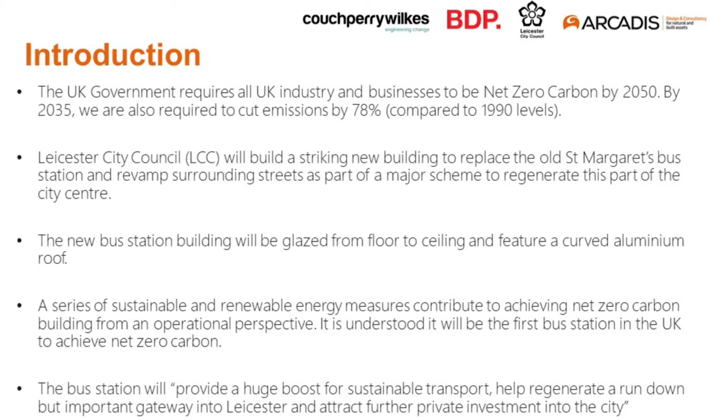The approach to net zero carbon is achieved through operational energy, which CPW will present on further. Just looking into kind of LCC's strategy.

So like many local authorities, Leicester City Council has declared a climate emergency. And after public consultation, they are now in the process of implementing a climate emergency strategy and action plan. So the authority is working to improve air quality to encourage a more greener, healthier lifestyle.

Recent examples of this are the pop-up cycleways that you may have seen introduced through the city during the COVID pandemic, and more recently the introduction of the electrical bike share scheme, and also a new fleet of electric buses powered by 100% renewable energy, which will be replacing the diesel vehicles.

At the previous webinar, Energy and Sustainability Manager Anna Dodd provided details on LCC strategy and dived into the detail. But to recap, there were 6 themes: at home, travel and transport, consumer choice and waste, at work, land use, green space and development, and the council.

This project delivers on 2 of those 6 themes, and the focus is on the council, which has owned and operated the premises, and through travel and transport. This project helps the council deliver its vision by becoming more of a carbon neutral and climate adapted city by 2030.

And this has been delivered through the infrastructure and services for promoting walking and cycling, through low carbon public transport and electric ultra-low emission vehicles and charging.

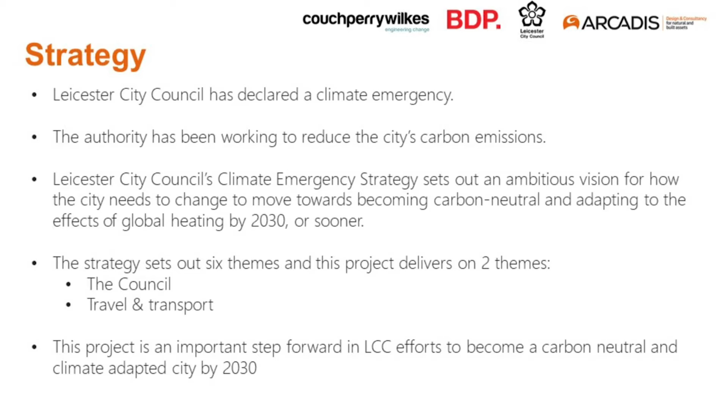Now moving into the project overview, Arcadis has been appointed by Leicester City Council to deliver a complex inner city centre regeneration scheme. The scheme comprises a redevelopment of a regional bus and national coach station, including all works to the adjacent highways, involving one of the city's busiest inner ring road junctions.

As part of the design process, several sustainable factors were considered. Firstly, we've been working with LCC to retain and reuse the structural steel frame. This yields significant environmental savings compared to recycling, at a time where there is growing pressure in our industry to become more resource efficient, reduce waste, and lower embodied carbon impacts.

Secondly, a number of sustainable technologies have been incorporated into the scheme, such as PV, air source heat pumps, electric vehicle charging points for the city's electric buses, and an electric cycle docking station. Through these, we've been able to reduce and offset the building's demand for energy to achieve net zero carbon, saving the equivalent of 96 tonnes per annum.

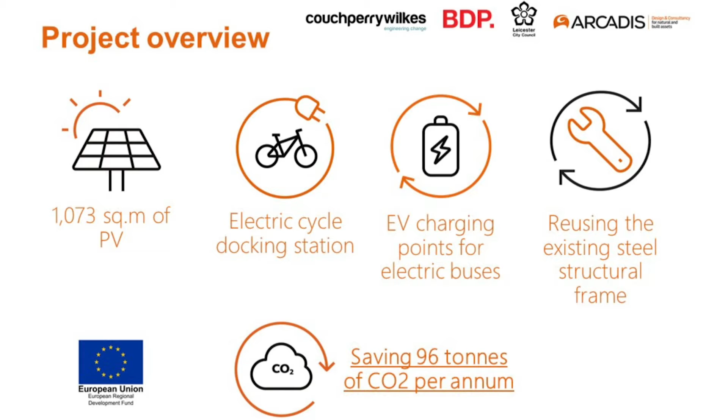This project demonstrates Leicester City Council's commitment and standard for projects and developments going forward. Thirdly, from a highways perspective, we're providing safer, better connected and more attractive walking and cycling infrastructure, in line with other cycle lanes formed throughout the city.

The accelerated programme delivery timescales meant multiple activities had to be carried out simultaneously in order to achieve the station highway works completed in line with MHCLG funding requirements. Project funding was awarded in August 2020, and planning approval was obtained in January 2021.

To maintain an accelerated programme, the building demolition was procured separately and completed in April of this year. We've recently appointed Morgan Sindall as the main contractor to deliver the project, which will be completed in Q1 2022. I will now pass over to Tom to present the building design.

So thanks for that, Anesh.

My name's Tom Hewitt, I'm director at BDP. When the council first approached us about this opportunity, they had some fairly clear objectives they were trying to achieve, and anybody familiar with the environment pre-demolition of the station will recognise that the public realm needed significant enhancement.

There was a requirement to get National Express facilities incorporated, which currently sit out onto the street and compromise the traffic and safety there. The environment itself is very narrow and quite dark.

The council wanted to increase operational capacity in line with their specific objectives for improving transport across the city. Moving onto the interior, they were very conscious it was quite an industrial character environment, and wanted a much more light, airy and welcoming environment for the increased customers.

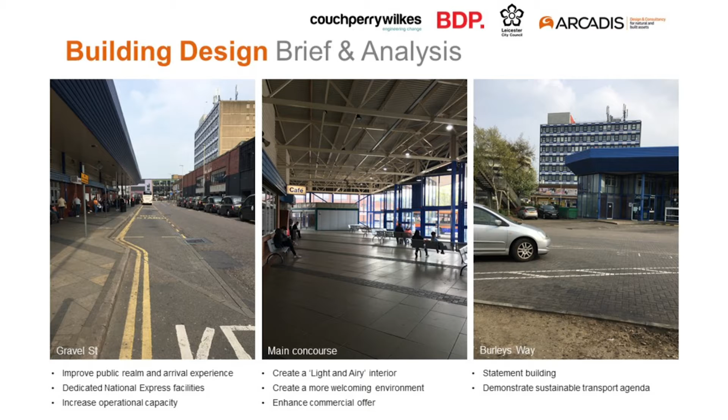They also wanted to improve any commercial offers they could within the station. Looking at the exterior, it doesn't really cut the mustard in terms of the quality of the environment this is trying to achieve - quite a heavily compromised industrial sort of environment when you see it from Burley's Way.

So we looked at a whole range of different options which configured the site differently, with the objective of trying to create both a characterful environment but also one which increased the overall capacity and improved the circulation as much as physically possible.

Whilst some of these options did increase capacity, usually this was at the expense of either customer safety, in terms of people having to cross the apron or cross between zones where the stands are located, but also created a series of separate different buildings - and more buildings means more expense, more complexity. So you end up coming back to the point where you might as well keep things more or less in the location they are.

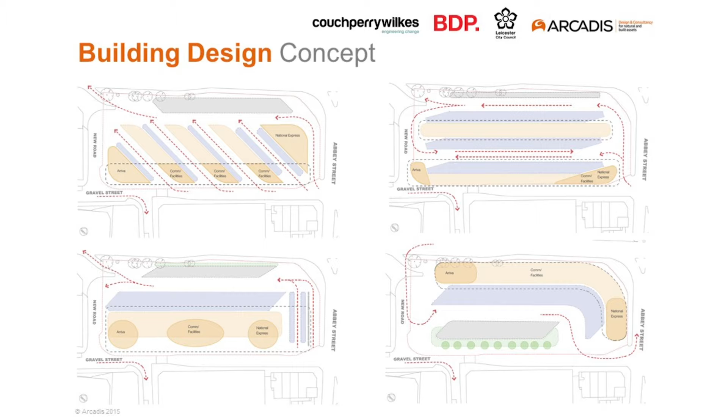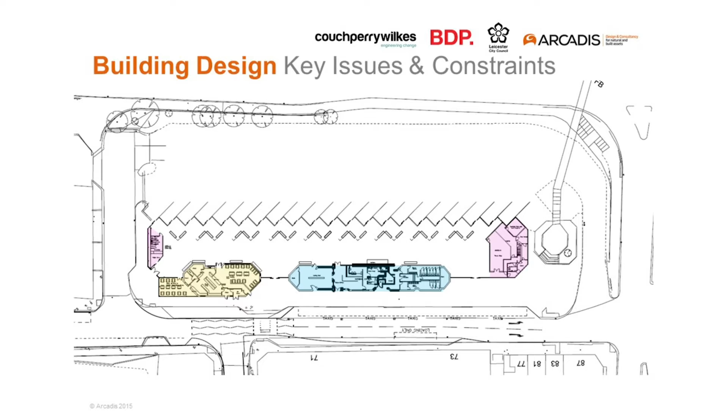And so that's where we started to look again. If you're familiar with the bus station as it was, you'll recognise that the body of capacity within the centre was all located on the west, east and southeast sides. Effectively all of the capacity blocks off your visibility into the concourse area and created a very blank series of facades with almost no windows into them.

The definition of the bus bays to the north, which was sort of sensible logic at the time, actually restricts the number of buses you can get there and doesn't give you any flexibility - there's 18 chevrons, 18 buses, and that's it. So obviously we wanted to overcome that.

The public realm we've already mentioned, but it's weak on the Burley's Way side as well as the Gravel Street side, and so it was something again we wanted to try and address.

The bridge which used to cross over Burley's Way and land right at the end of the bus station was an odd feature anyway, but that's since been removed, and that's allowed us to consider expanding the facility to the north. The other thing to point out is that none of the entrances line up with the approaches to the bus station, whether from Burley's Way itself, compromised by the bridge or trees, or from the approaching streets, so you're presented with blank walls in each of those situations. That's something we felt was important to overcome.

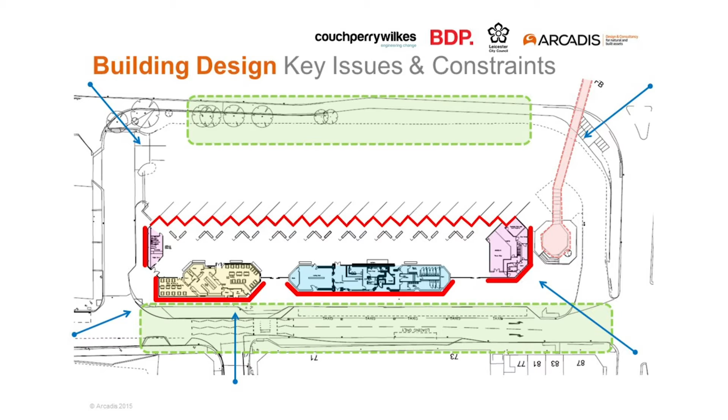Conceptually, we've looked at two fundamental issues here. The first is retention of the existing structure, reusing the building as far as we physically could, which is obviously very sensible in commercial terms, but also in program terms. Anybody aware of steel prices rocketing at the moment will recognise that anything we can do to mitigate the amount of additional steel work we need to procure is going to be sensible.

The overall conceptual approach is to consolidate all of that capacity that was previously spread around the site into one area as far as physically possible. So you can see we've grouped the majority of the capacity over two levels, now that the location allows that, which increases the capacity but also makes it much more efficient.

That then becomes a building element which separates off a new National Express facility to the north side, but also allows us to open up the whole of that concourse to achieve some of those specific objectives that the council wanted to consider.

You can also see that we've taken a straight line for the building rather than following the chevron pattern of the stands themselves, and this obviously gives us a lot of flexibility in the future, so hopefully there's some future proofing identified.

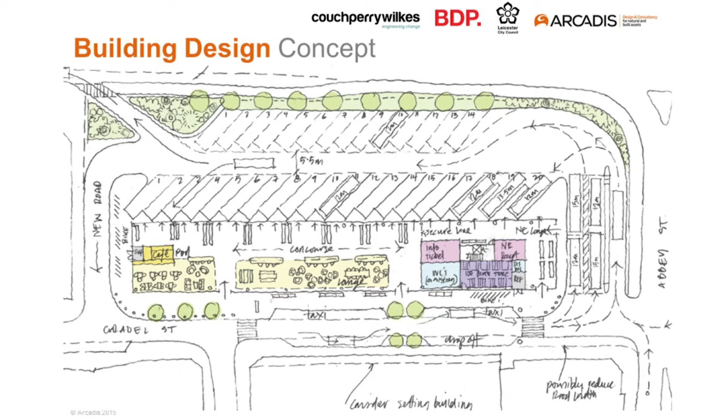You can see also that we've tried to open up the corners and create straight lines of visibility, so you can see your entrance and your target of getting into the bus station from the approaches.

As I mentioned, the sustainable objective has been implicit from the start within the brief. Whilst reusing and repurposing the existing structural frame is a good solution as a base point, architects will nearly always now be looking at mitigating other energy consumption issues. So maximizing your daylight to minimize the amount of lighting you're having to drive, and also minimizing the amount of solar gain you get, which saves on the energy costs associated with cooling that environment, are pretty fundamental to this.

They supplement a passive, sustainable approach right from the outset. Obviously this is then something we can capitalize on, as Matthew will describe later, in terms of the specific net carbon zero objectives.

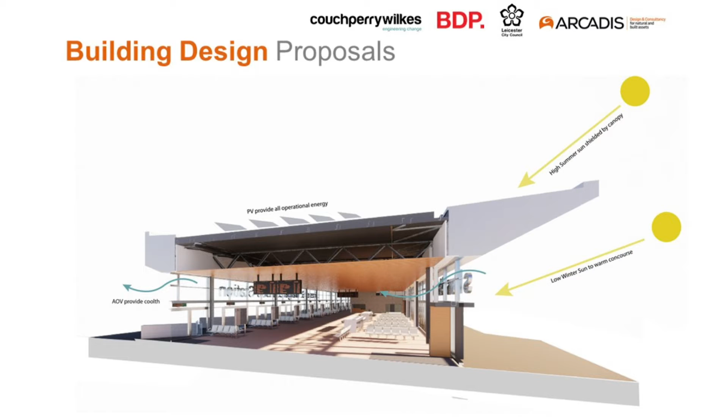Here you can see how extending the eaves on the building in strategic locations allows us to both minimize the impact of solar gain but also maximize the daylight through the concourse. We're also looking at how we can use activated ventilation so that there's a cross flow through if things do get particularly warm outside.

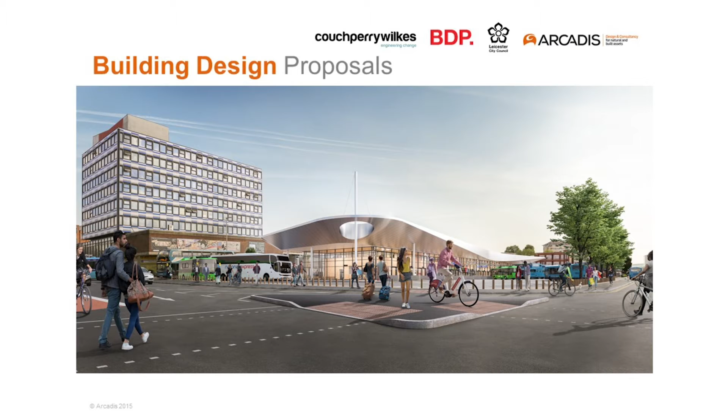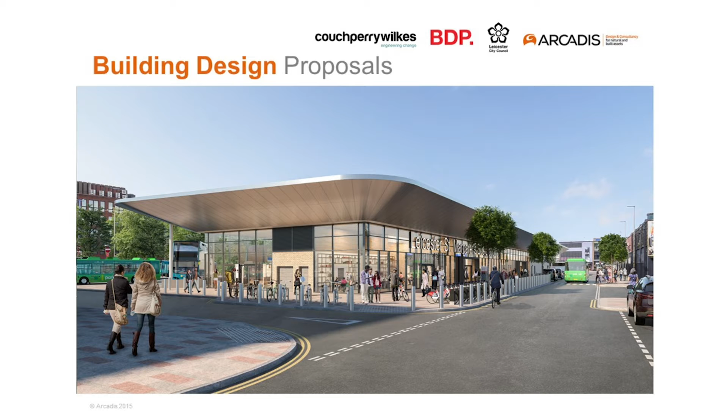So I'll leave you with a before and after image from Burley's Way, and also the before and after on Gravel Street. We're looking forward to delivering the project in the form that you can see here in the immediate future. So I'll hand over to Matthew, and he can talk specifically about the sustainable objectives and how we're achieving net carbon zero.

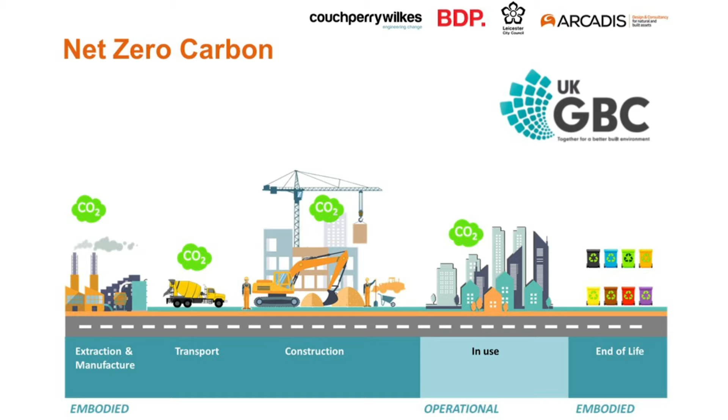I'm just going to demonstrate to you how we've met the net zero carbon targets. I'm going to refer back to the ProCon webinar that happened a couple of months ago, where John Alker from the UK Green Building Council set out the definition for net zero carbon.

Moving on to the definition for net zero carbon, this slide sets out the requirements of the different phases of the project. To the left of the diagram is the pre-construction phase, which is all of the carbon that's gone into the materials in the construction process. Then there's the in-use phase in the middle where we're working, which is the operational energy use, so we're offsetting the regulated and unregulated carbon emissions for the operational energy use.

And that's all done on site, so there's no off-site payment, there's no carbon offset going on. It's all done through a PV array on the roof, which we'll come on to talk about later in the presentation. But just referring back, as John alluded to in his presentation, realistically, to offset that embodied carbon, we would be looking at some sort of off-site solution.

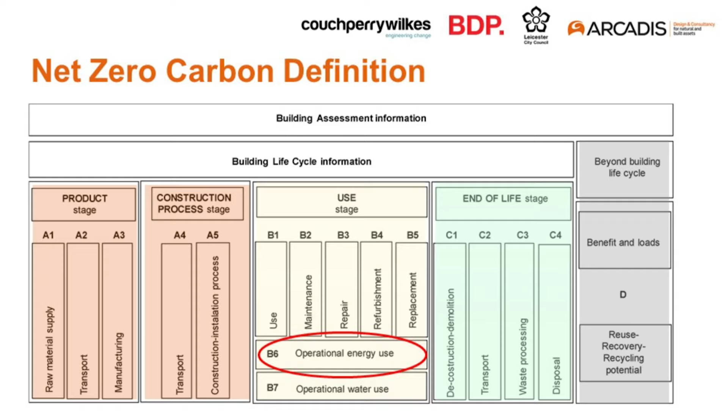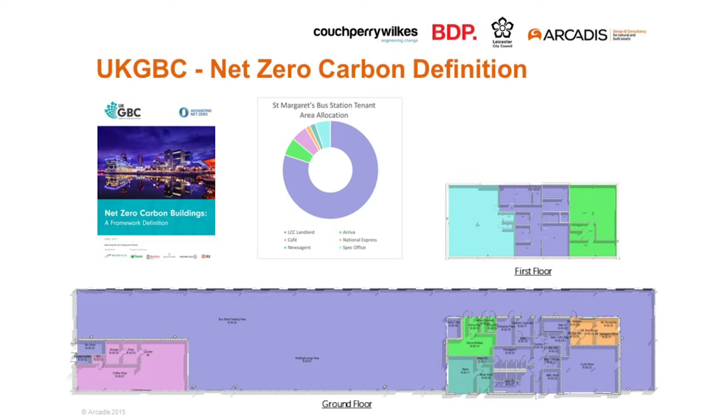This diagram shows the carbon emissions related to each tenant's area of the building. As you can see by the large bar, that's the Leicester City Council, the landlord areas, and as you would expect, it's the dominant area, representing about 75% of the carbon emissions of the building. So what we're actually required to offset is around about 96 tonnes of carbon.

Now that bar is split into two. The top portion, approximately one third, represents the regulated carbon emissions, and that includes all of the energy efficiency measures we've applied, like your LED lighting, which we'll come to speak about later. That's all taken into account in reducing that bar already. Then the dark blue element is the unregulated energy consumption.

And this is that harder to get bit. It's out of our control as designers. It's the small power, the appliances, it's cooking consumption, that sort of thing. And that's why John referred to it as the stretching target. So we're offsetting all of the emissions for both regulated and unregulated for the base building.

So this slide demonstrates how we've achieved that. As I mentioned earlier, we've got a large PV array on the roof - in fact, it's a 230 kilowatt peak array. And that's able to offset, as you can see in the first bar, the regulated emissions, and then the second bar all the way down to zero carbon for the unregulated emissions as well. That's how we demonstrate compliance with the net zero carbon target for the Green Building Council.

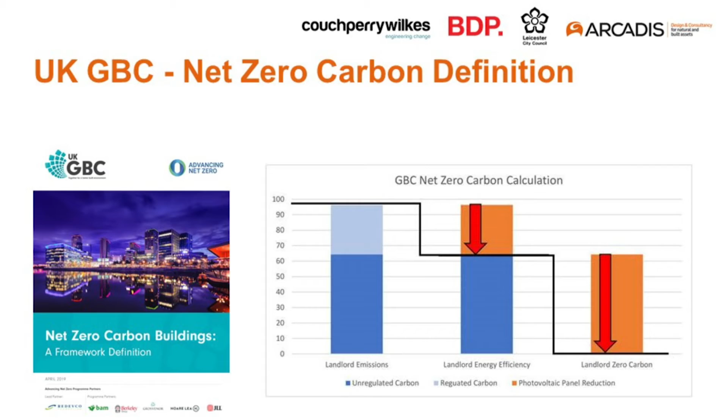And just for completeness, this diagram represents the building regulations assessment. Again, the first bar shows the actual reduction achieved through energy efficiency measures, and the right-hand bar shows the further carbon offset achieved from the PV on the roof. Now, I just want to highlight that this is exceeding the building regulations requirements. The carbon is reducing approximately 22 tonnes of carbon emissions, where our PV array has a further 42 tonnes to add on top of that building regulations requirement.

So as John alluded to, we're reaching the stretching target of the Green Building Council's definition, but we're also reaching the minimum target, as he alluded to, for local authorities for the building regulations element, which is the regulated carbon emissions for the whole building, including all the tenant areas.

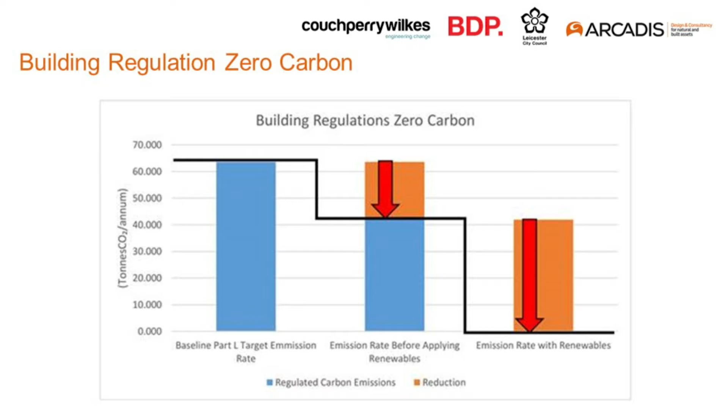Okay, so I'm just going to talk now about the M&E solution. We've avoided fossil fuel consumption entirely. We've gone with an all-electric solution, so very much in line with the government's decarbonisation strategy.

We needed a lot of glass on the project because of the type of building it is, that connection with the buses outside. The people need to see outside and into the building. Therefore, the building fabric had to be really enhanced to offset that glazing element. Now, a product of having a lot of glass, of course, is lots of natural light, which is great, but...

...the risk is overheating, so we put a lot of effort into mitigating the overheating risk. Some of the diagrams there show the sun path analysis that we did. But the main element for that was the large overhang that goes all the way around the building, which obviously offers rain canopy as well, but really it's there to control the solar gains.

A big decision on the project was about the concourse. Obviously, it's kind of 70% of the floor area of the building. And the key decision there was to unheat the concourse, simply because we're going to have a large infiltration load with people coming in and out of doors all the time, lots of air leaking in and out. Therefore, the decision to keep the space unheated was sensible in terms of energy efficiency. Then we can just treat the tenant areas within the building itself - still have an external thermal envelope, but have an unheated concourse area.

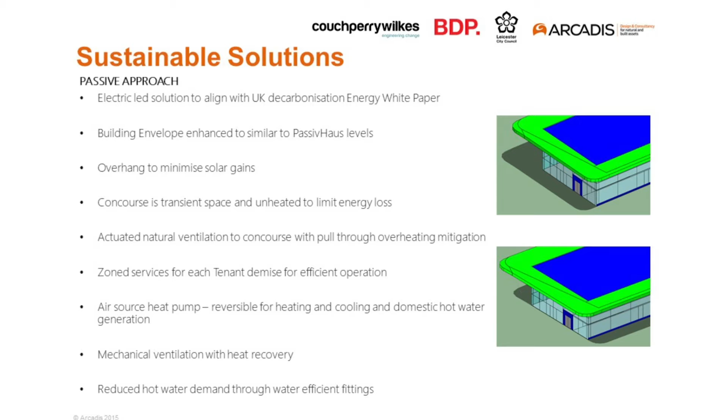Another benefit of having the glazing was that we could have lots of window openings for natural ventilation, so we're able to have a nice, light, airy strategy, which was the brief in the first place for the concourse. Then on top of that, we've got zone tenant areas, so that if any one of the tenant zones was unoccupied for a period of time, it could still operate efficiently because those services could be isolated.

One other thing I want to highlight is a bit of a contradiction between energy efficiency and the function of the building: the cafe area. We've got a cafe tucked away as part of the concourse. From an energy efficiency point of view, I want that box sealed because we're treating the air within the cafe space. However, from a retailer's point of view, they want it nice and open. I want to highlight that because it's one of the contradictions we work through between the function of the building and trying to achieve the zero carbon status.

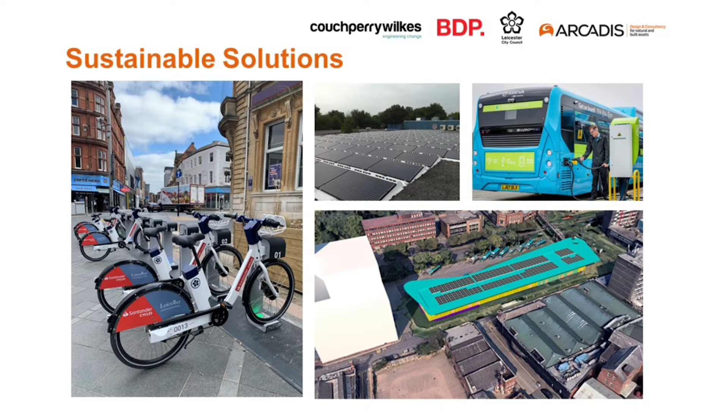The other sustainable solutions for the project, as I mentioned before, we've got our roof-mounted PV array doing all of our carbon offset on site. Some of the other solutions include electric bus charging elements and electric bike charging elements. So not only are we offsetting the emissions from the building, but we're starting to provide that low carbon economy solution for all of Leicester, and also starting to offset the emissions from the transport sector as well.

So in summary, we're achieving the net zero carbon target for both the Green Building Council's definition for operational energy and also the building regulations requirements, which we'd traditionally see as planning requirements. We're getting not only cost and programme savings from keeping the existing steel structure, but the embodied carbon savings of keeping that existing steel are huge, as are the carbon savings from retaining the existing apron where the buses are outside. We've got lots of natural light into the building whilst controlling that solar gain, so we've managed to achieve that light and airy feel in the concourse area, but in an energy efficient way.

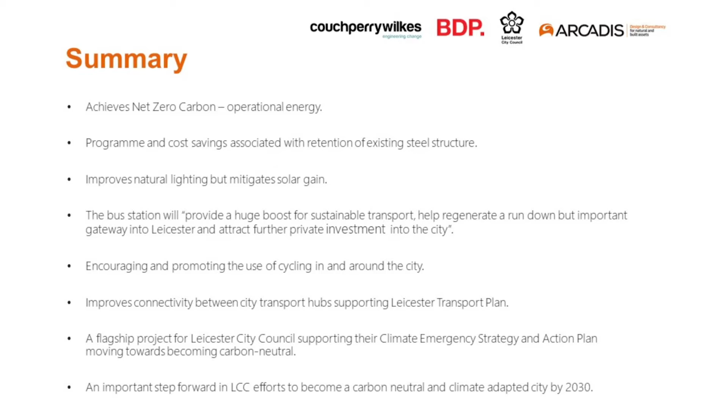Obviously, the development's going to provide a huge boost to the city in that area. It's quite a key gateway into the city, and hopefully this is the catalyst now for regeneration of that part of the city centre. It's encouraging, again, low carbon solutions in terms of transport around the city, very much in line with the Leicester Transport Plan. We see cycle lanes being installed, and it also connects the city's transport hubs between the various transport sectors. It's a flagship project for Leicester City Council, very much supporting their climate strategy and that move towards the 2030 target of achieving carbon neutrality. Okay, thank you very much.

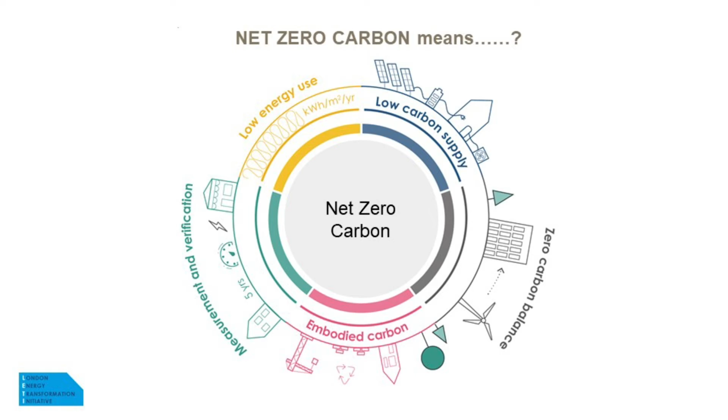Willmott Dixon as an organisation has committed to adopting the UK GBC net zero framework and also LETI's approach to net zero carbon in the projects we're delivering over the next 10 years. To break that carbon life cycle of a building down into chunks, if we look at the amounts of carbon emitted in a construction project, we've got a big chunk at the beginning associated with embodied carbon, all of the materials and processes to deliver the project to a stage of PC.

Then we have a number of years of operation where that building is using energy and emitting carbon associated with that energy, and some lumps of embodied carbon associated with replacement and maintenance of kit. Then finally, at the end of life, we've got issues around how we dispose, recycle or reuse that building and the carbon emissions associated with that.

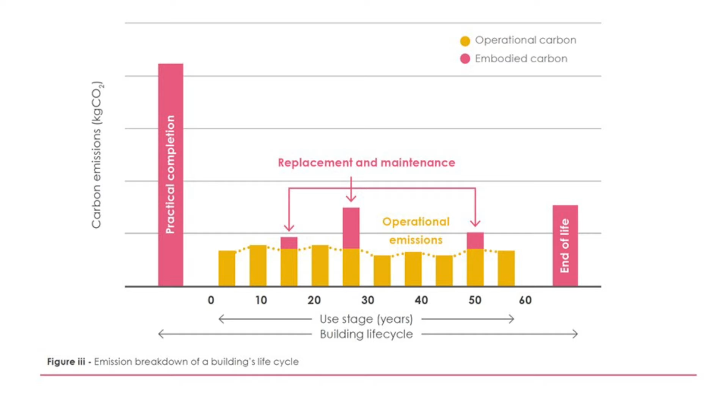So that whole life cycle is divided into both embodied and operational carbon emissions. The principle of net zero can be defined in two ways. One is that all of the operational carbon associated with any new building or development we create is offset or balanced by an equal amount of carbon in terms of renewable energy or emissions reductions elsewhere.

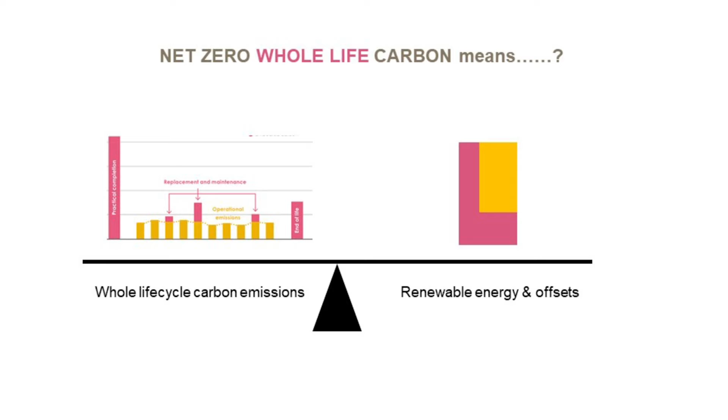So that new development is net zero, it does not create any net carbon emissions as a result of operating. If we want to take it a step further and look at whole life carbon, that would entail all of the emissions associated with the entire life cycle of the building, from raw materials all the way through to the end of its life, being covered by that renewable offset and balance. That's a much more challenging target, and one worth thinking about in terms of which of those two things is important to your organisation when aiming for net zero projects.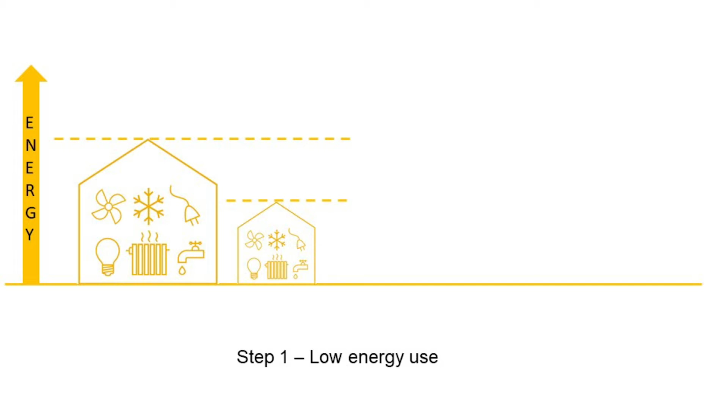The most important one of those is the first, and that's to make sure that the amount of energy our buildings and homes are using is as low as possible, to drive that down to the lowest feasible level that's economically achievable for the project. So how low do we need to go? That's the question that is perhaps at the heart of net zero buildings.

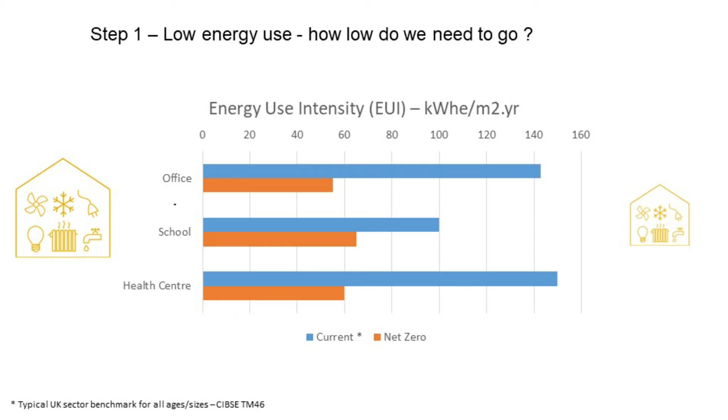So how do we do that? There's a number of different solutions, but one I'd like to touch on today is Passivhaus. You can see the energy efficiency standards that Passive House sets, and it's broadly in line with the targets that net zero buildings require. So if you're building to Passive House, you're automatically ticking the step one energy efficiency box.

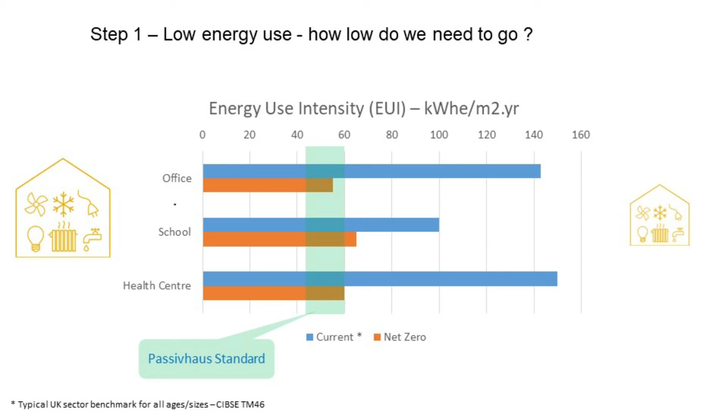So Passive House delivers both high energy efficiency and great air quality and environmental standards in terms of comfort and building space. It's an interesting approach, and one that I'd recommend you investigate.

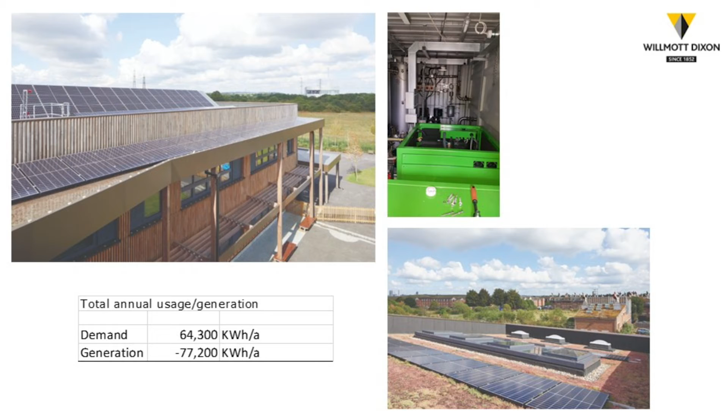Another project we completed is interesting from a net zero carbon point of view. It achieves the Passivhaus Plus standard, which is essentially all of the energy efficiency benefits Passive House gives, as well as an additional amount of renewable energy. You can see the figures showing the annual energy demand and the amount of renewable energy generation from the solar PV systems on the building, which are in excess of the energy demand annually - making it essentially net zero inherently in terms of its energy efficiency and renewable generation.

And we'll talk about that in a sec when we look at solar PV in a bit more detail.

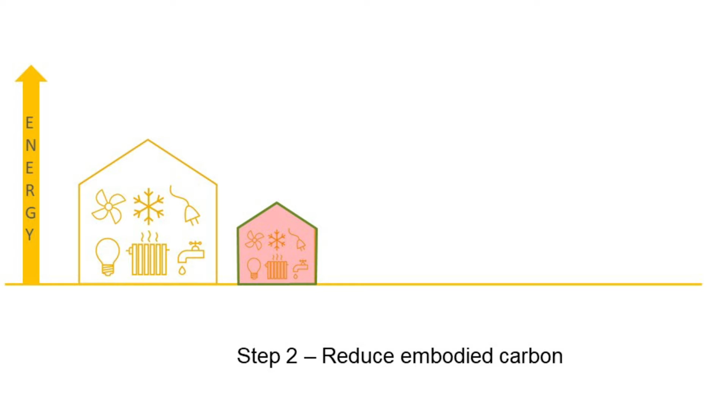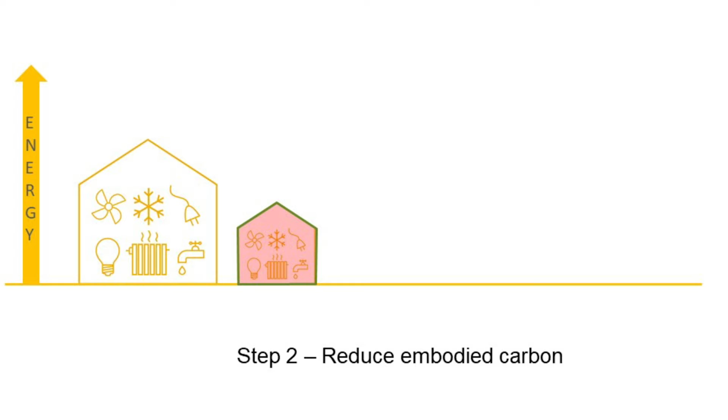Step 2 in that journey of net zero buildings is, once we've reduced the energy, what do we then want to consider doing with embodied carbon and all of those issues around the materials and processes that go into creating the building in the first place.

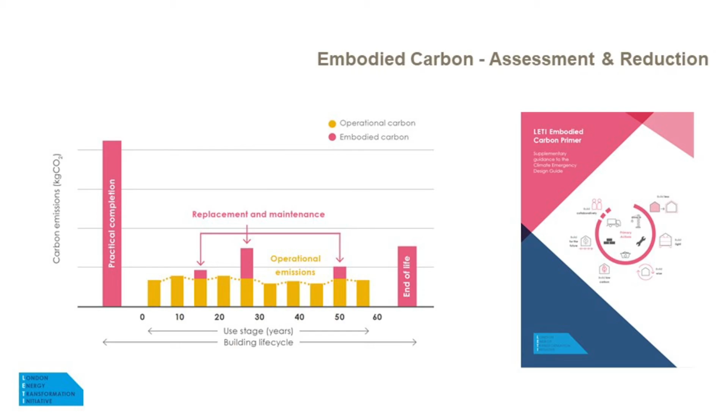Essentially the key message there is measure it. We don't put figures on this in construction projects routinely these days, and that's very much the first step, and the step that Willmott Dixon's taking on our projects is to robustly assess and develop options for reducing that embodied carbon.

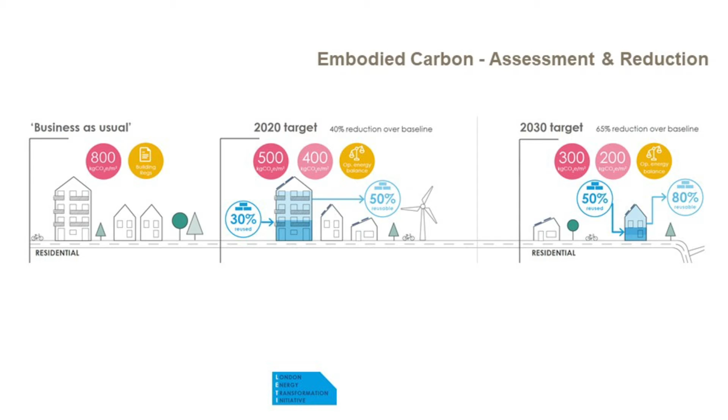So one of those is a residential project that we're currently about to launch, which is a standardized and bespoke way of making residential development homes which achieve net zero carbon in operation and also have been optimized for running costs and embodied carbon reductions through their life cycle.

We want to show that through projects and offers like this that these things can be practically delivered in today's environment.

So the third step in our net zero building is, having reduced our energy and thought about our embodied carbon, to balance that carbon emission with low carbon energy supply.

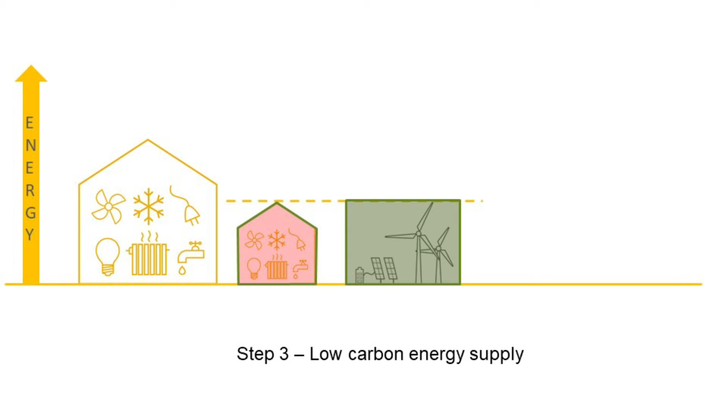And the method that we've used most extensively currently in the projects we're delivering, and find to be an excellent solution in terms of performance and outcomes, is solar PV generation.

You can see there one of the buildings that we've created at the University of Warwick on the biomedical research building, using PV in an innovative way both vertically and horizontally to maximize the amount of generation from the building, and also replace some plant screen items that would otherwise have to be made from other materials—so a reduction in embodied emissions there, as well as generating renewable energy.

And in the final picture, one of the largest ground mount solar parks in the UK currently being constructed in Kent to generate 350 megawatts of energy in solar power terms. That's roughly a quarter of Hinkley Point Power Station at peak output.

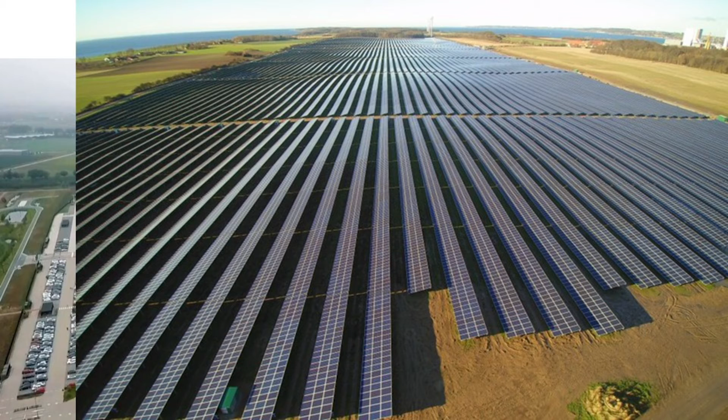This technology is being constructed at scale, and what that allows us to do is create some significant economies of scale. And the cost of solar PV in real terms over the last 8 to 10 years has come down by a factor of 3 or more.

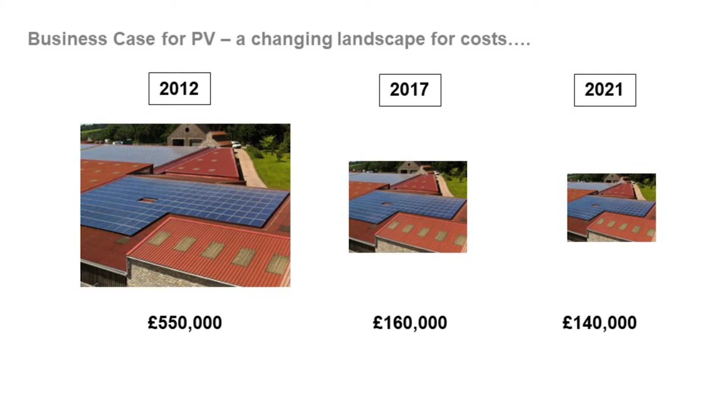And that economic benefit of mass production and grid scale systems is something that we can take advantage of in built environment systems on our rooftops.

So what we've looked at in Willmott Dixon is ways in which we can help our customers to do that for net zero buildings, and we've come up with an innovative approach to providing solar PV energy on a pay-for-the-energy basis, as opposed to pay-for-the-equipment to make the energy.

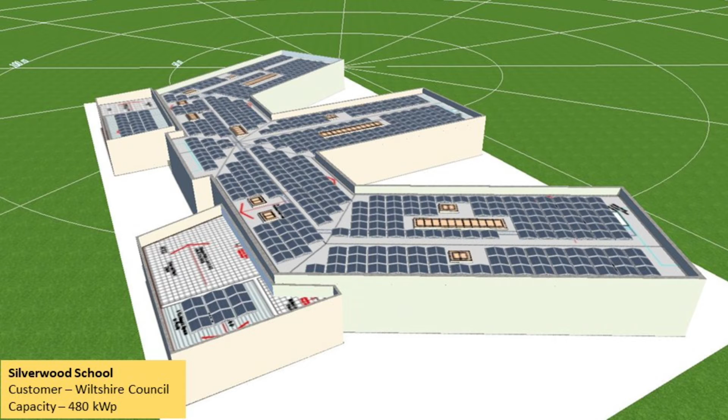We're in the process of rolling that out on various projects currently with some of our customers, including the one you see here, which is in the final stages of design on a large special educational needs school that we're building for Wiltshire Council, where we'll be generating almost as much energy as we are consuming in the building, in the same way you saw with Hackbridge School earlier on.

And finally, innovation in solar generation and energy happens in your neck of the woods, in a very progressive development that a number of you may be aware of in Nottingham at Trent Basin, where the developers Blueprint and their partners have installed battery storage in the form of the Tesla battery system you see at the top right, along with solar PV generation on the development, part of which was built by Willmott Dixon.

A combination of those energy systems provides effectively a private wire electricity network to the development, giving the residents and occupiers of those homes all the benefits of low carbon systems and moving towards a net zero kind of development for the future.

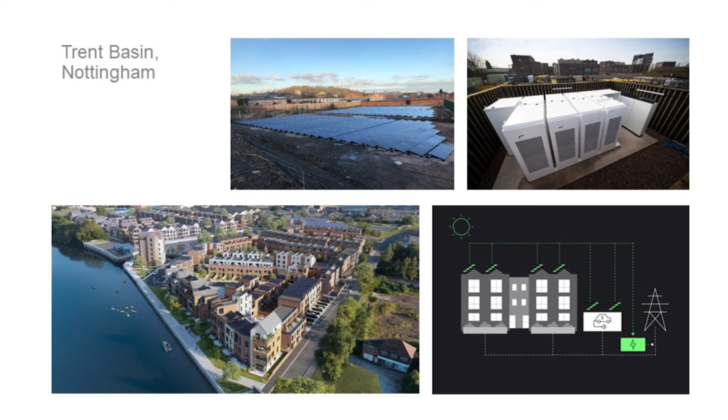So a great example there of that kind of innovation. And the last step in our journey is perhaps the most important one, because all of the prior steps are really design and build processes, and we've done all the good stuff.

We've reduced our energy, we've reduced our embodied emissions, we've provided lots of renewable generation, but unless we actually measure and verify that all of that stuff is actually delivering the predicted amount of energy usage and the predicted amount of generation, then it's not really a net zero building in actuality, and that's what we actually need to achieve to make an impact on climate change.

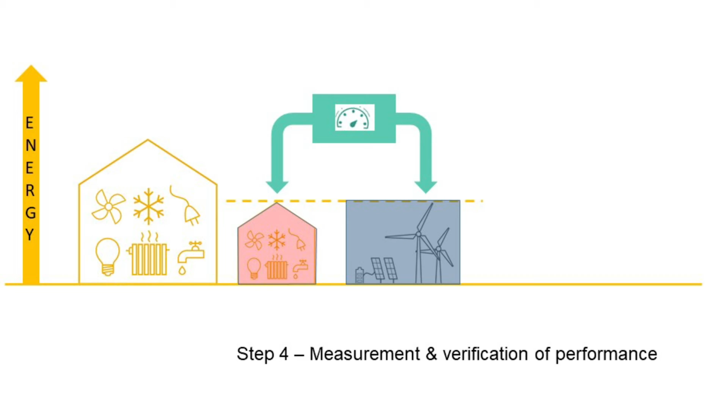So that M&V part of the process is really important, and I can show you here an example of how a passive house building in Leicester, the one you saw earlier at the university, has been tracked through its performance in the first 2 or 3 years of operation and actually achieved a measured performance outcome, as you see there in the display energy certificate, that's equivalent to less than 25% of the carbon emissions of a typical building of its type. Not quite at net zero levels in overall terms, but in energy efficiency terms it is.

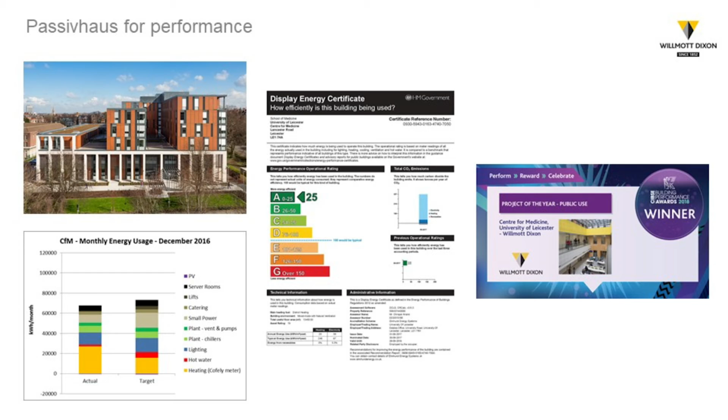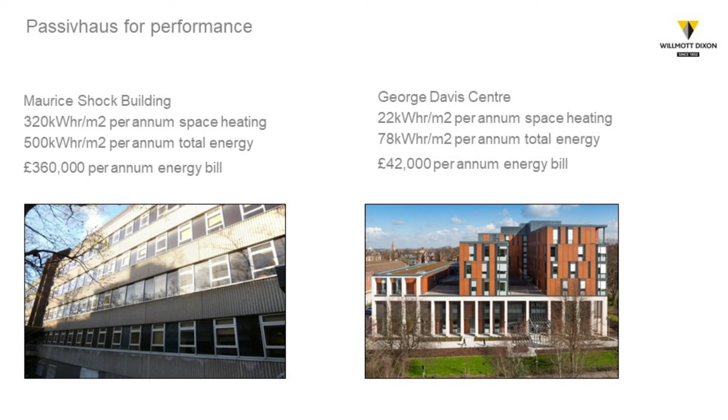As well as in its operating costs of ownership. At Willmott Dixon, we took some of the learning from that project and we used that to develop a system process called Energy Synergy, which essentially is a process to target energy performance and measure against that target value in operation.

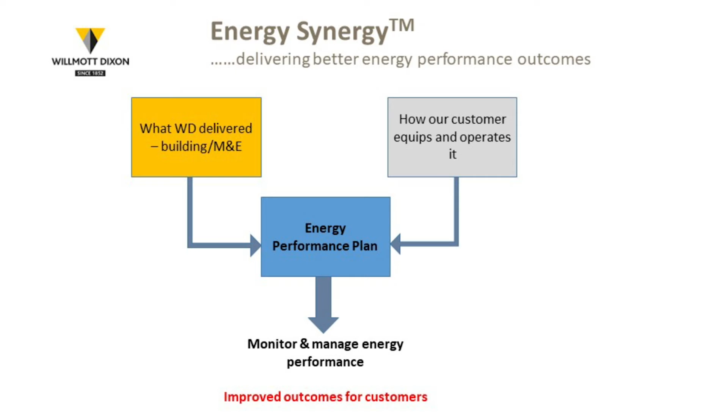And we've used that process on a number of pilot projects over the last 2 or 3 years while we've been developing the approach. One of which is at the University of Warwick on one of their large sports centres that we completed there a couple of years ago.

We used the process there to, as you see in the next slide, compare target performance with actual performance on a monthly basis and identify areas where savings could be made or where there's a discrepancy between expected performance and actual performance.

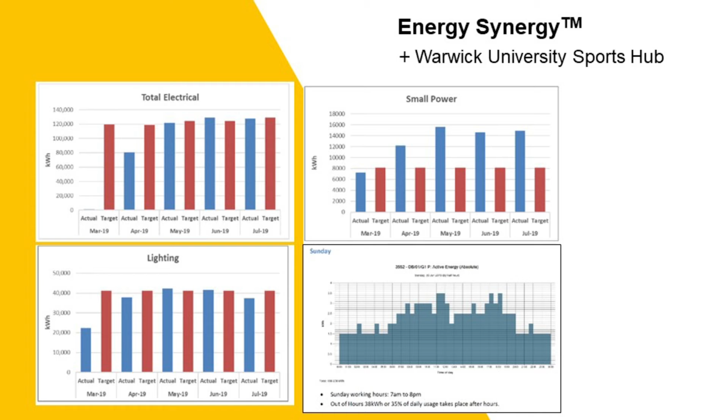Very useful learning there, which allowed the university to change its operating regime and make significant savings. And you can see there in terms of the overall benefits of that process on the building, the kinds of numbers that we looked at saving in terms of potential saving levels, in terms of different systems by way of PV generation or consumption, and the carbon and cost savings associated with that.

And if you'd like to hear a few direct views from our customer, Joel from the University Sustainability Group, there's a couple of articles on our website there where he's talking about the use of energy synergy on this building and also some subsequent projects we've delivered for the university.

So that concludes my rather rapid spin through net zero carbon buildings, and during the Q&A I'll be happy to take any questions from you about how we all need to rise to this industry challenge of net zero. Thanks very much.